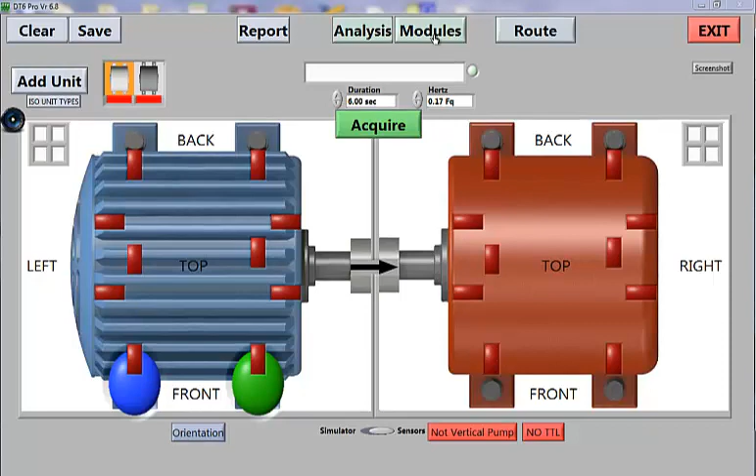So in this video, we're going to go ahead and talk about the Update International 10-point plot, which is a type of modal resonant analysis that you can do in the DT6 software. So if we toggle over to modules, we'll find the 10-point plot right here with this kind of shape to signify resonant curves. So we'll go ahead and click that.

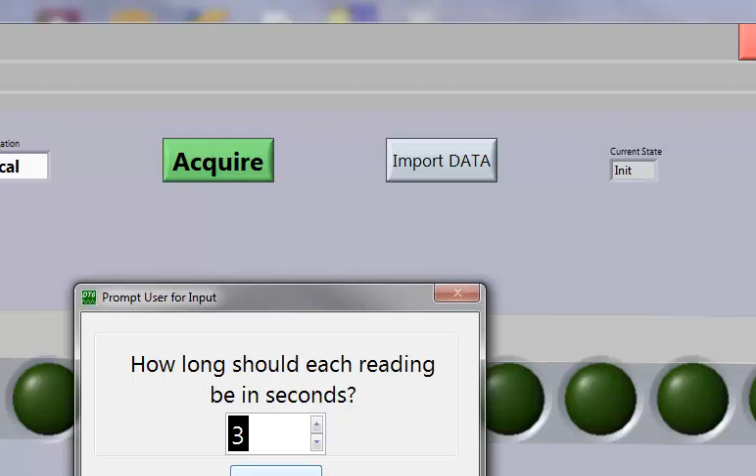And the first thing it'll pop up with is how long do you want each reading to be. So most of the time you can just hit the default of 3 seconds. If you do it longer, you'll get higher frequency resolution later, but it doesn't really matter, to be honest. So if we hit OK, then we get this screen. This is the main acquisition screen for the 10-point plot.

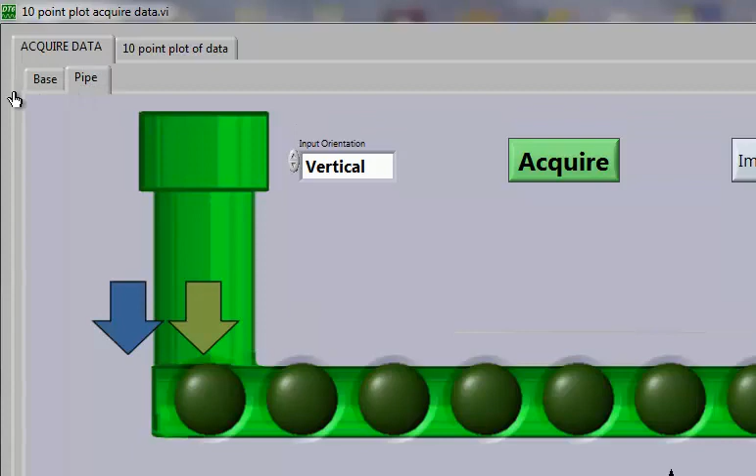So right here we have two tabs just to toggle what the background image is, just so you can remember what it is you're trying to look at, but it's purely for aesthetics. But here we can see how it's set up. So although it's called a 10-point plot, in reality you always take 11 points because it's 10 differences, so you have to have 11 measurements.

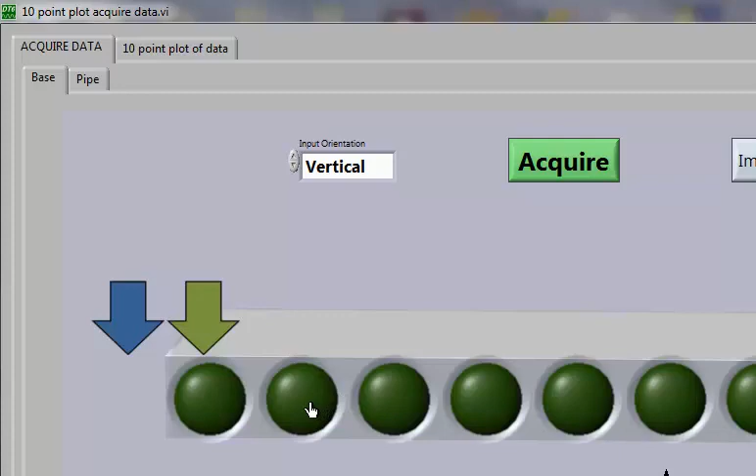But basically the way it works is you leave the blue sensor in some location and leave it fixed there throughout the entire setup process, and then all you do is click and we can move the green sensor to wherever we want it. So if we were to try and take readings, we would just put it here, and then we would tell it which orientation our sensors are in.

So for instance, most of the 10-point plots I do here in the office, the setup is on a long horizontal platform. So I put the sensors in the vertical position, which means that the magnet is pointed towards the ground as opposed to being towards a horizontal shaft like it normally would be. But if you have it in the normal orientation, you'd go ahead and switch it to normal. But most of the tests we do here are vertical, so it just defaults to vertical.

But you go ahead and change that, and then you just leave the blue sensor where it is, and put the green sensor in this location or wherever you want. You can do any of these in any order just by clicking, and once the green arrow moves there, you're telling the software you're going to take this measurement. And then you just hit acquire, and once it's done taking that measurement, you click to the next one and take it, and so on and so forth. And you don't technically have to take every measurement, but it's best if you can.

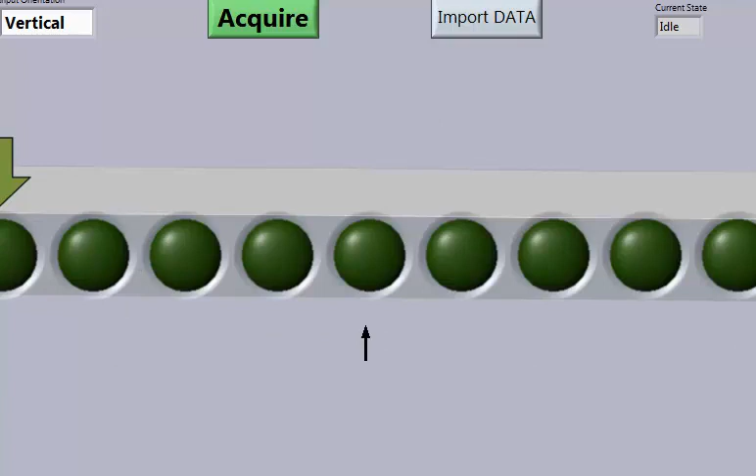The other thing I'll mention is that it's best if each of these measurement points are physically spaced out as equally as possible. So if you maybe take a measurement every 6 inches, that would be good. And you want to take it over the whole length of whatever it is you're looking at. So if you're looking at one specific unit, for instance, you would want to take it from as far to the left as possible to as far to the right as possible.

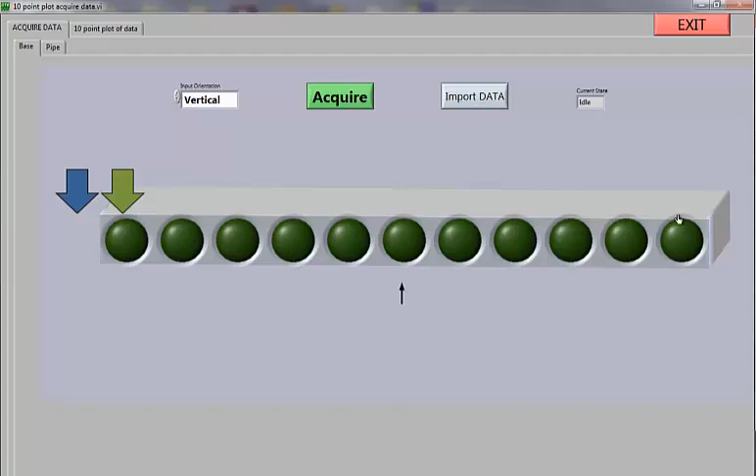But in this case, I'm just going to go ahead and import data just because it's a little bit easier, so that I don't take all this time to take the data. So if we just import, I'll just click this one. Go ahead and open that, and you can see that as you take readings, each of these lights would turn green. So you basically would just hit acquire, and once the little dot turns green, you have that reading, and then you can just move forward.

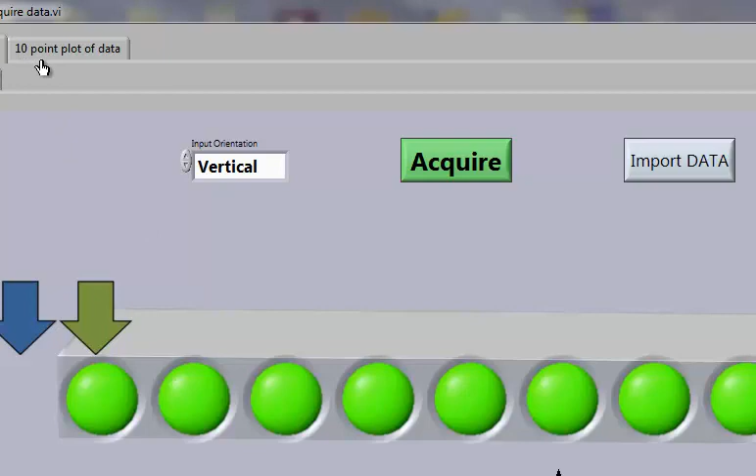So once you have all this data, then you can go up here to the tab that's labeled 10-point plot, and you go ahead and click that, and that's where we can actually start seeing the analysis. So we'll go ahead and hit choose new frequency, because the software will work to analyze the resonance at any frequency. So the first thing it'll ask is, which channel do you want to see the waterfall plot for?

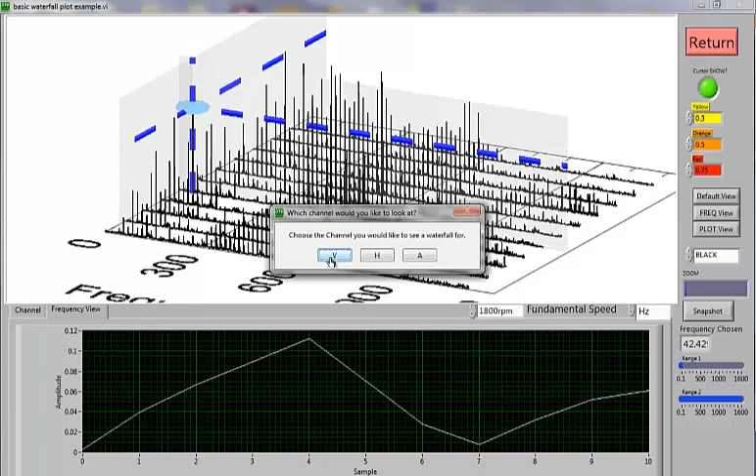So the way you choose the frequency is you choose a waterfall plot. In this case, I have a feeling the resonance is in the vertical, so I'll go ahead and click vertical, and it'll just show me a waterfall plot of the vertical. You can see frequency increases this way, then this way are each of those readings in order, and then the height is the amplitude.

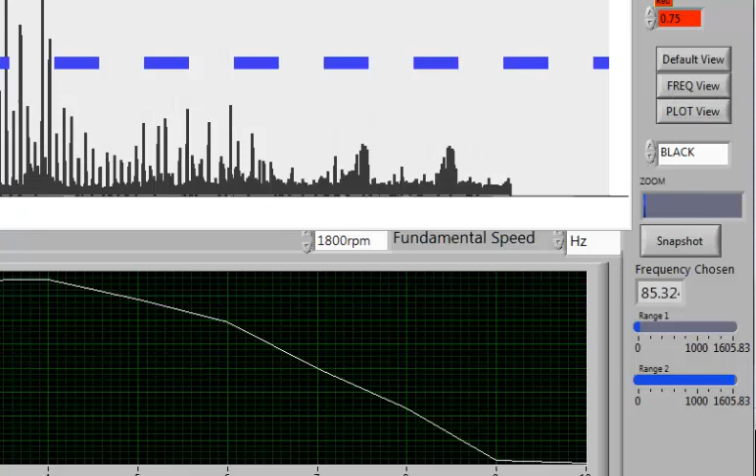The height and the amplitude don't really matter at all for this, so that's why they're not really listed. And if you ever have the views get kind of messed up, you can click here, default view, or we can look along the frequency side or the plot side. In this case, I'm going to go to default, and then down here we have some ranges. This changes the range of frequencies we get to see.

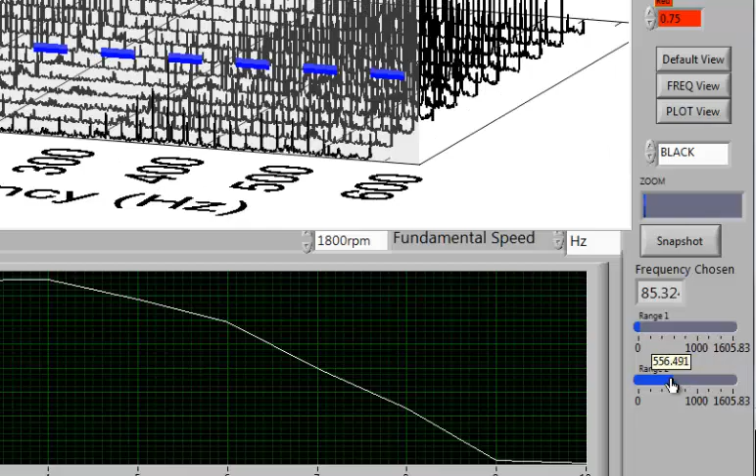In this case, I'm going to zoom in down low, and I'm going to look for some sort of range of amplitudes that doesn't seem to be even the whole way through. One of the ways we can see which colors are changing is over here we have some amplitude threshold levels that will change the color, and if we switch this black to levels, it'll change the color of peaks that are portions of the frequency that are above that amplitude threshold.

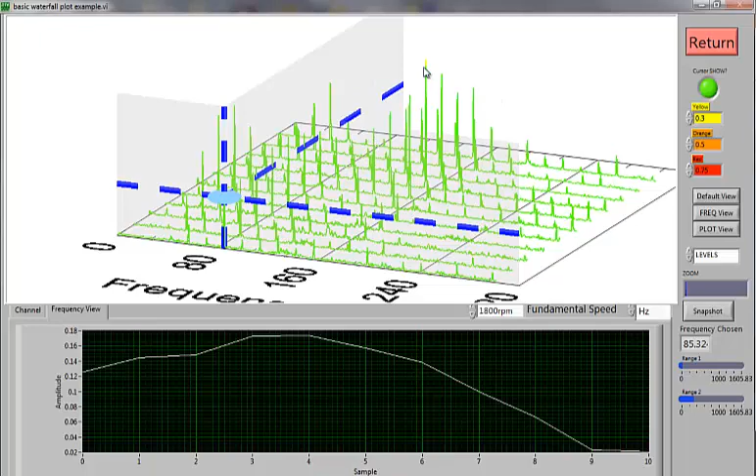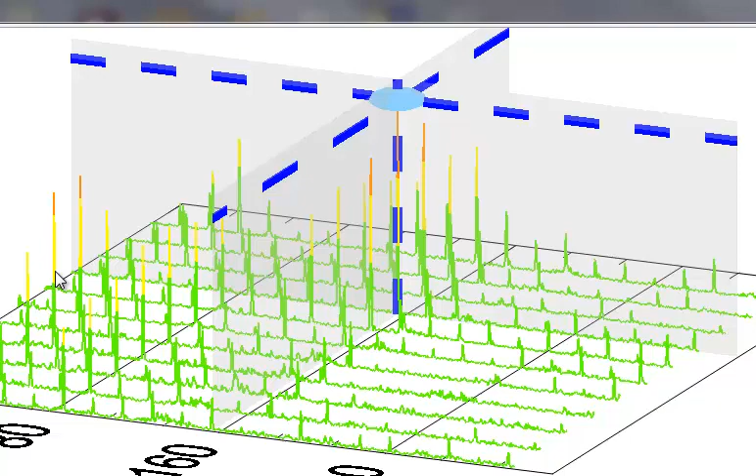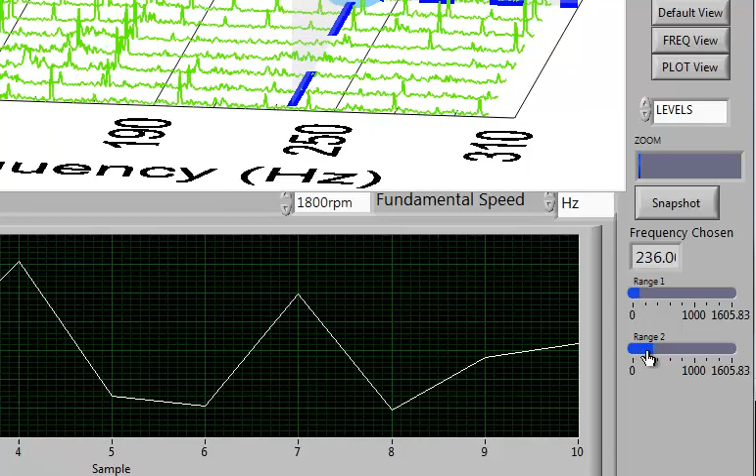So in this case, if I lower yellow to like 0.1, lower orange to like 0.2 and put red at like 0.3, we can see this frequency right here if we move this cursor. To move it, you just click and drag it and then let it drop on the peak. You can see that at that frequency, and let's sweep up a little bit. There we go. We can see that the amplitude of this guy actually goes up to here and then kind of comes back down, right?

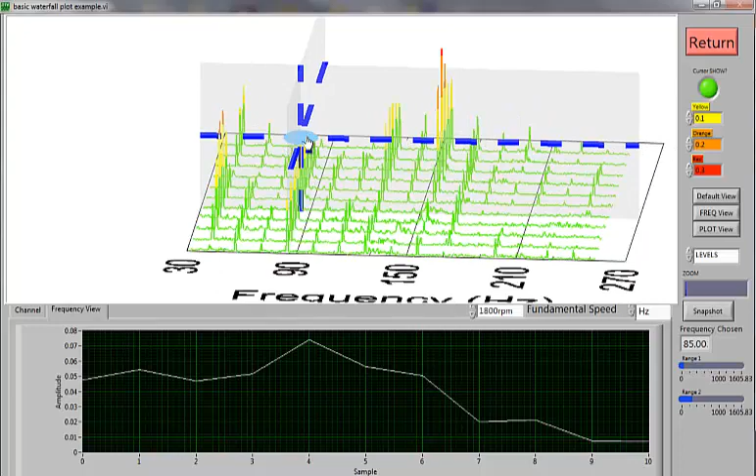And in this case, the one I really want to look at, from my own experience, if we zoom back out a little bit, is this one right here. So you could analyze the resonance at any frequency, but in this case, I know for a fact, just from experience, this is the one I care about.

You can see here, if we zoom in a little closer, these amplitudes go up and then down and then up. What you're looking for when you're doing this sort of resonant 10-point plot analysis is amplitudes that go up and down, because that means they're not uniform in size along the length of whatever device or unit or pipe you're testing.

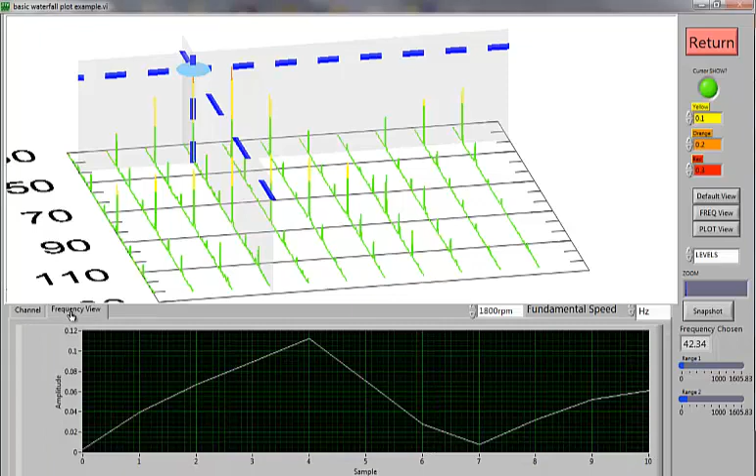Over here you can see there's a frequency view, which shows you all of the amplitudes at that frequency. Right here we have 42 hertz chosen, so this shows all of the amplitudes of each of those measurements at 42 hertz. Then we can toggle the channel, which will show the channel we have selected. You see I have the fourth one highlighted by these dark gray boxes, and this shows the FFT of that. But the frequency view is arguably more useful in this case.

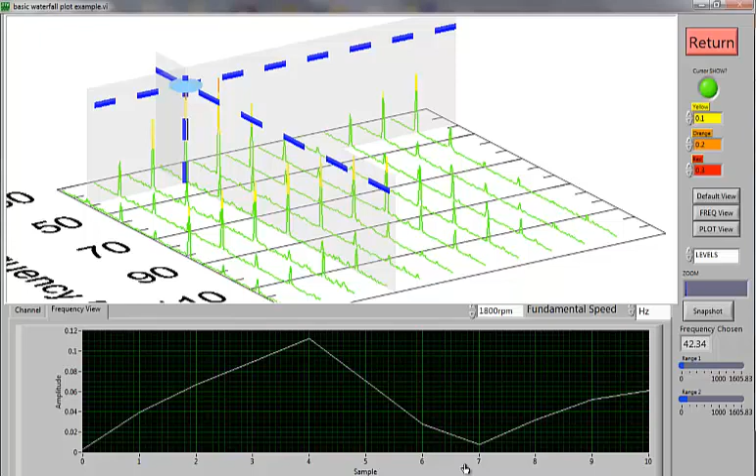So here we can see, yep, we've got an amplitude that goes up and down. When you're looking for possible resonances, you're looking for things that follow clear sinusoidal shapes, where at some point it has an amplitude close to zero and somewhere else it has an amplitude really far away. That's a pretty good indication there might be a resonance going on, because in a resonance there's always some spot that has zero amplitude because of the way it works.

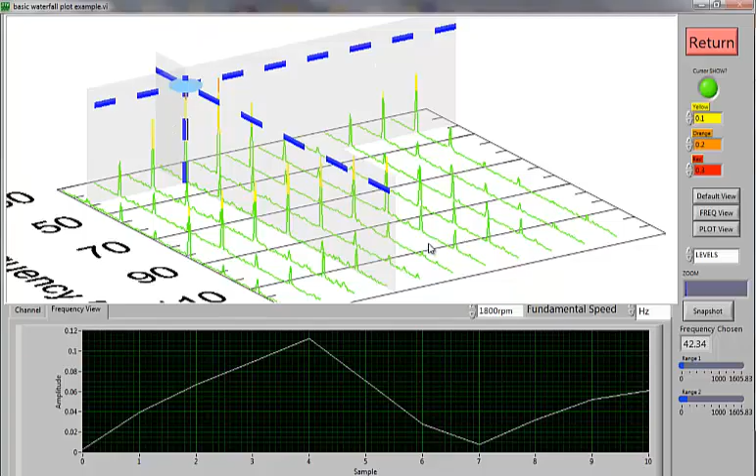And so now that we've chosen this as what we think is our problem, we can just hit return, and it'll automatically pop in that data here.

And we have two tabs here. We have vibration data, which will just show us, for that frequency we just chose, a vertical plot here. So this is the amplitudes. And we can toggle on whether or not we want to see a negative version of those amplitudes, because that can sometimes help you get an understanding of what the curve looks like as the shaft resonates, how it moves up and down.

So you can flip a negative, and here you can see that it would be in one half of the curve at one point, and then here it would shift to this bottom half. So the resonant is going back and forth like this. So this would look like it's a 2-point resonance. And it looks like over here it didn't come back down to zero because I didn't quite take as many. It looks like the resonant of this part that I'm looking at is actually further than just where my motor ended. So it's actually probably the base that it's sitting on.

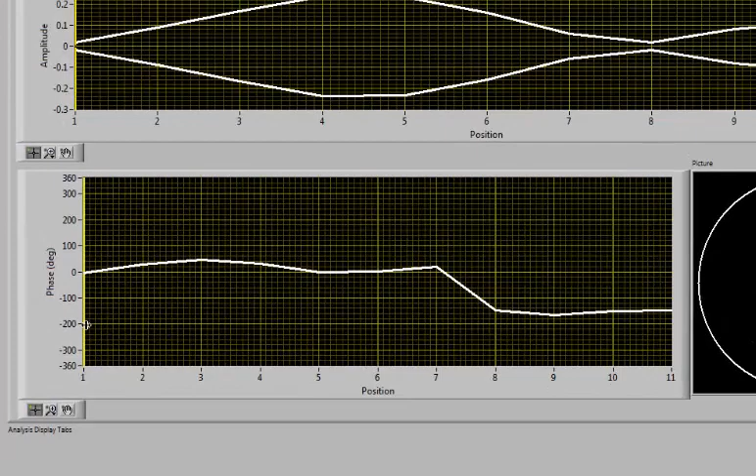But we can click right here on the bottom curve where it shows the phase. We can click and drag this yellow cursor, and here we can see a circular phase plot to see how the phase changes as we go along the points. So here, I don't know if you can see, but we're in the top right region all the way here, and then right as we pass this 7-8 we flip to the other side.

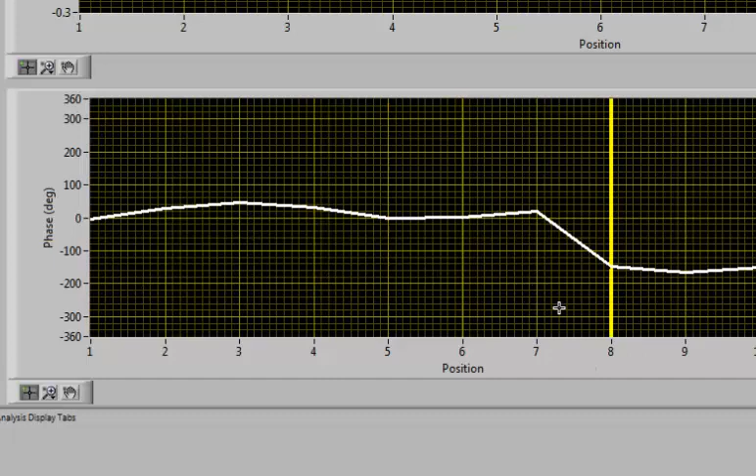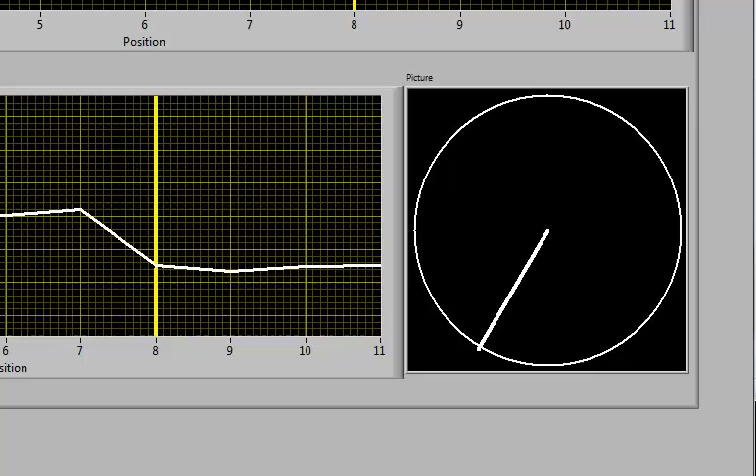So that's a pretty good indication there might be a resonant going on, especially because again we have close to zero amplitude here, close to zero amplitude here, and close to a high amplitude here, and probably another high amplitude over here. This really points towards a resonant. And so in this case, if we decided that this resonant was a problem, here where it's close to zero amplitude, these are called nodes, and here where it's at a high amplitude, these are called antinodes.

And if we were trying to mitigate this, we would want to put a brace or a mass or something right here at the antinode, because if we put it at one of the nodes, its vibration is already effectively zero, so either stiffening it or adding mass won't actually do anything. It's one of the common issues that people have when they try and mitigate resonance: they put their weight or their stiffness clamp or their piston or whatever in the nodes, and that's actually the wrong spot. They have to put it here. So that's the first thing to note.

And here we can toggle to see what the other channels look like for this given frequency. So here in the horizontal, we have high amplitude here, then it goes down to 0, and then it goes low. I'll show you this on the other screen. So this looks like it could potentially be a resonant, just because again we have 0 amplitude and then a high and a high. But resonances have to go back down to 0 at some point because of the physical limitations of the system. The ends don't move in a resonant scenario, at least most of the time.

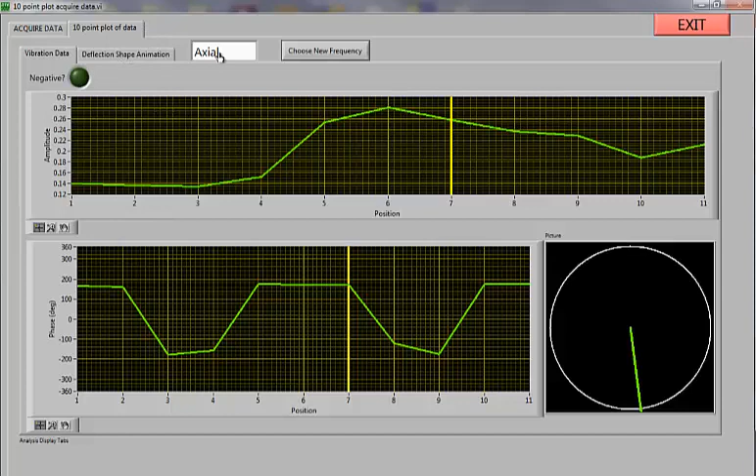So if we go ahead and do this, we can actually see how that shaft is moving. So it'll combine both the amplitude and the phase relationships to show how the shaft is moving at this frequency. So here in the vertical, we can clearly see it's not moving here. It's not really moving here, but it's moving a lot right here and a lot over here. So this looks a lot like a resonant.

And then over here, we can change how fast it kind of plays this graph. So I think right here is kind of a good spot. So this looks a lot like a resonant, and in this case that frequency I chose was 42 hertz, which is actually the 3 times multiple of what this machine was running at. And it makes sense because the machine has a 3-jaw coupling, so the 3 times vibration is going to be the significant one because of the 3-jaw.

And when I was tuning the speed of the variable drive, I could hear it get louder at this frequency, so I knew something at this running speed of the shaft was resonating, and it turns out it's this 3 times at 42 hertz. So that's why I wouldn't normally see it when I was at my full running speed of 30 hertz, but when I was put at a fraction of that speed, then we could actually see the vibration get louder, both physically and audibly, and this frequency is the reason why.

And so here we can clearly see this shows a resonant curve, and if we were to try and mitigate it, if we decided it was a problem, we would either put a clamp right here between where we put our 4th measurement and our 5th measurement, or we would put some additional weight here or something, and that would hopefully bring this whole vibration down.